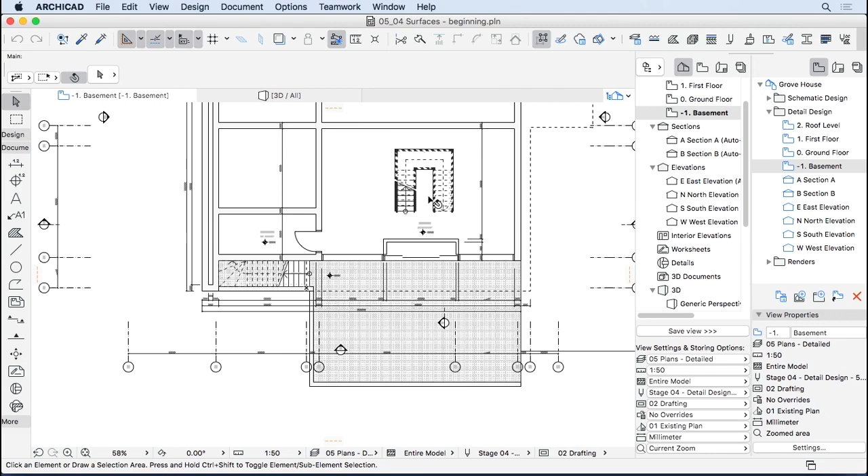Now let's take a look at the surface. I'll go here to the 3D view. Every element in ArchiCAD has a surface. Some of them have an image, like this stone wall here, and some of them have just a color.

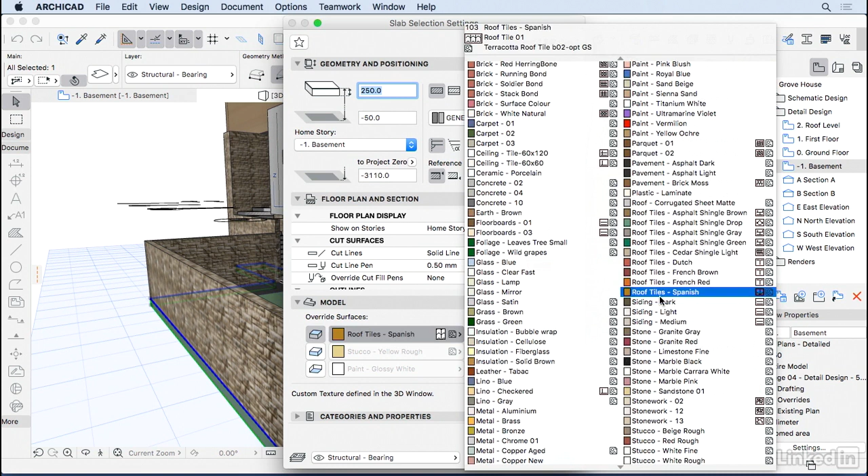Let's select this slab, go to the settings, and override the top surface with one of these surfaces. From the list you can see some have an image, some have a texture, some don't have any. I'll choose some kind of pavement - this pavement brick moss, which has a texture and also a fill. I'll press OK.

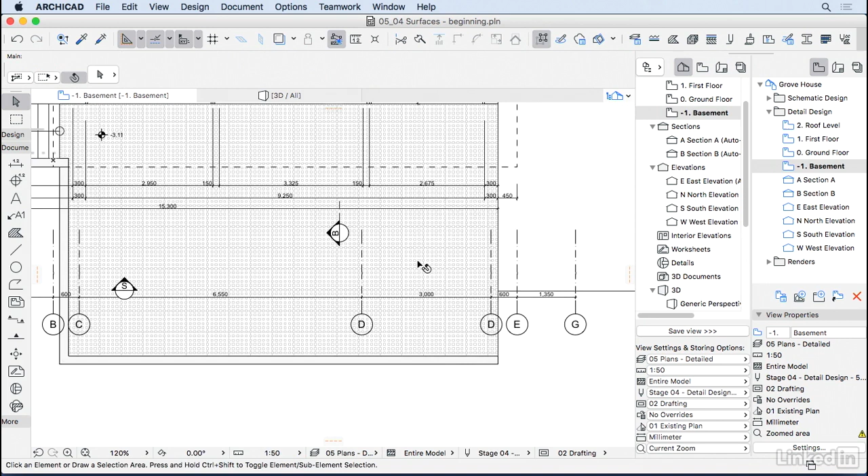If we look closely, you'll notice we have a picture. Let's go back to the floor plan, and we still have the grass paver texture here. That's because on the settings of this slab, we chose the grass paver cover fill. But if we check this box that says 'use fill from surface,' we should get the fill attached to the surface. That's better practice, so the 3D matches the 2D.

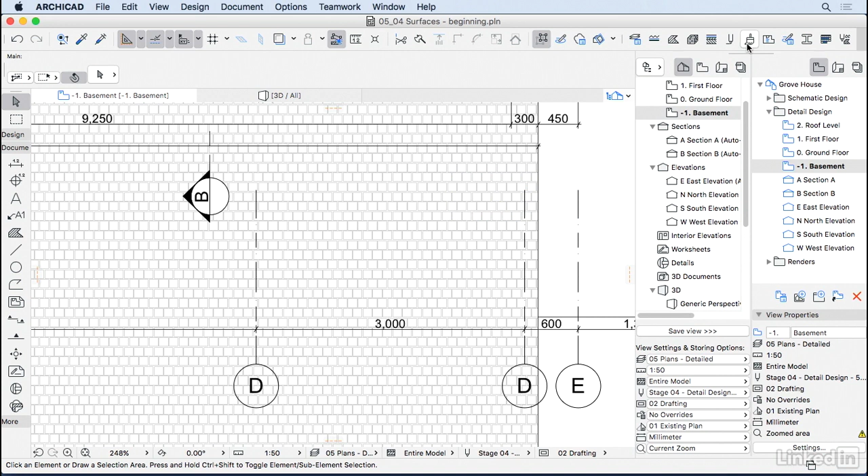So let's create our surface for the grass paver. To do that, we go to the surface option on the attributes bar. Here in these settings, we have first a list of all the surfaces currently in ArchiCAD, and buttons to create, rename, share, or delete a surface.

We can choose the engine we're doing the settings for. We have OpenGL, which is normally what we're looking at in the 3D, and CineRender, which is used when doing renders. We can do all the settings for render there, but we're not going to do that now - we're going to focus only on OpenGL.

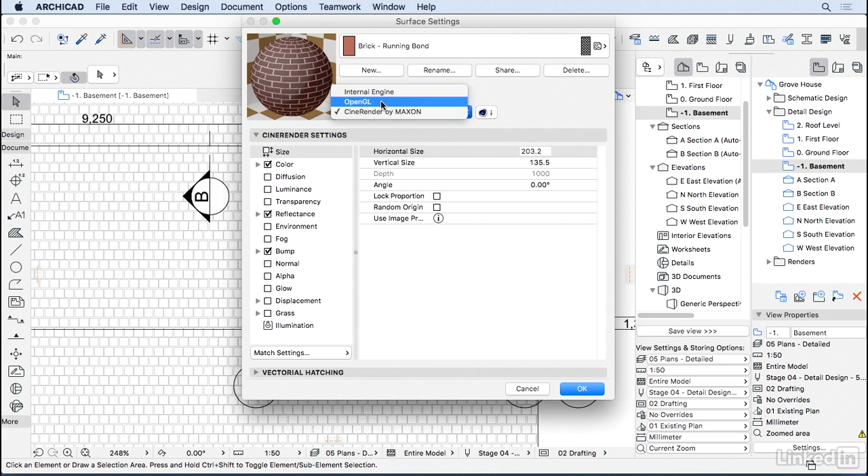We can change exposure to light, the surface color, whether it's transparent, and how the emission is - we're not going to change any of these now. We can also choose a hatching, which is the fill that goes on top of the surface, and finally a texture, which is the image that goes into the 3D.

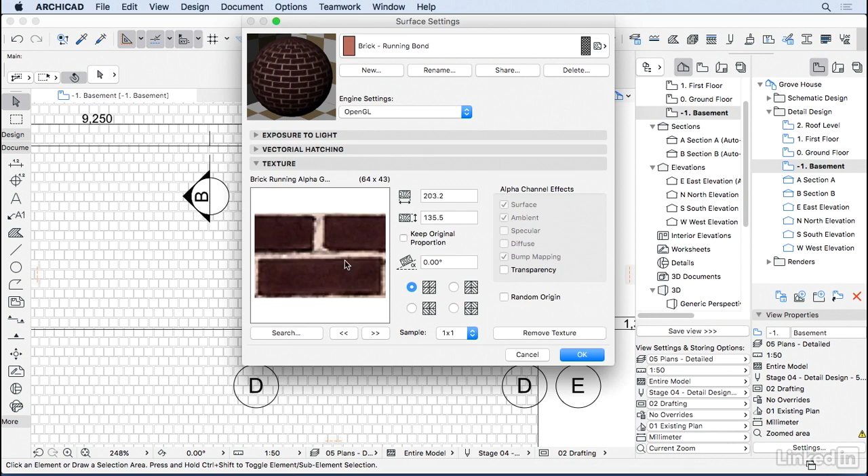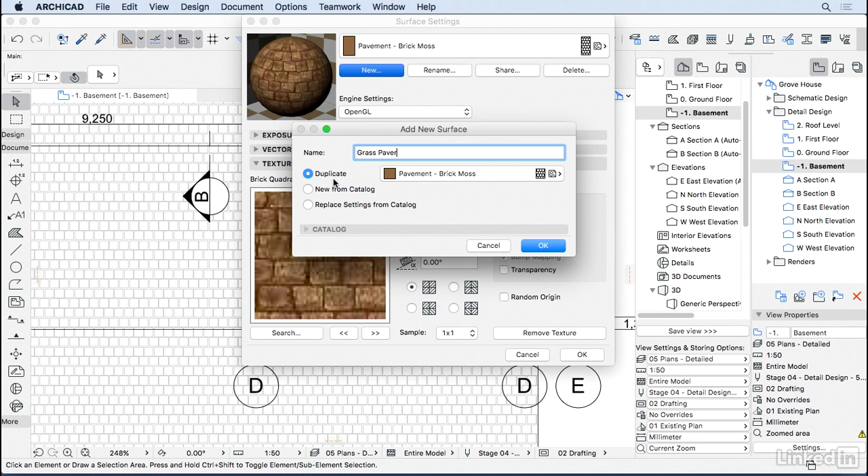So let's create our grass paver. I'm going to create it from one of those pavers already - I'll choose the pavement brick moss and press new. This way I'm duplicating and getting all the properties of that paver. I'll name this grass paver, duplicate, press OK. Here we're going to change first the color - I don't want it brown.

Let's double click here. I'm going to choose a kind of gray, but keep all the other settings for reflection and emission.

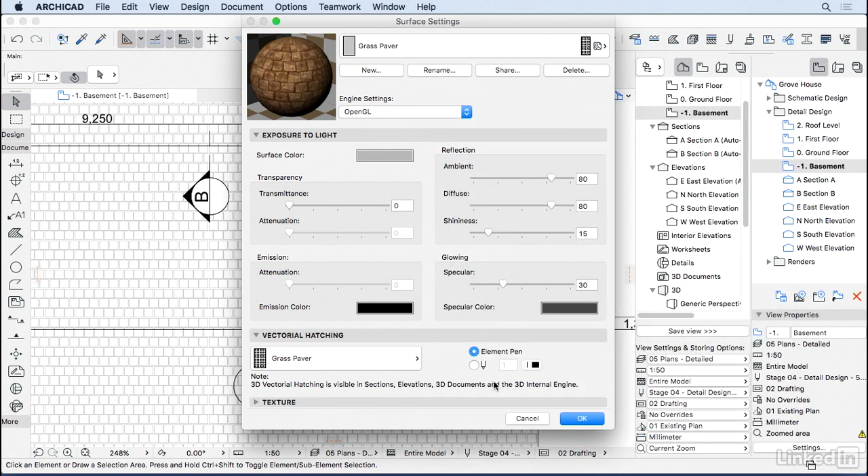Under the hatching, I'm going to change this pavement 14 and choose the grass paver. And for the texture, I want to choose the image I have - I'm going to choose this texture here.

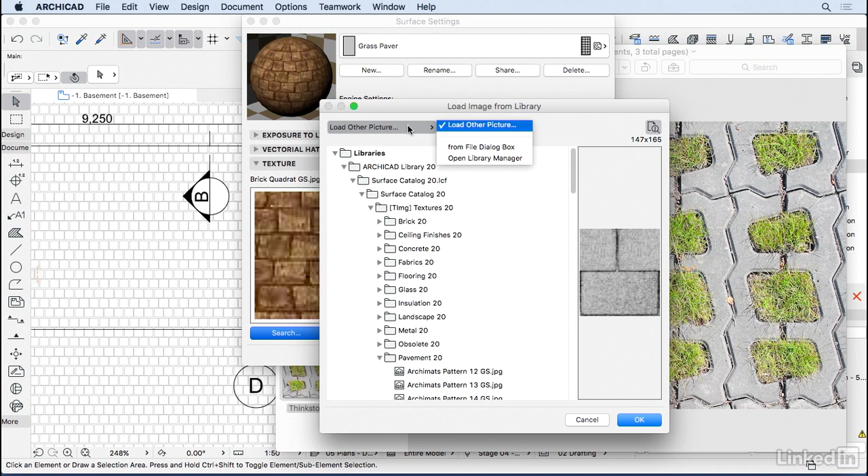Going back to the surface settings, I'll go on search. We have a lot of images built into ArchiCAD you can choose from, but I want one from the file. I'll click 'load other picture from file' dialog box, then go to the exercise folder, surface, choose this image, and press open. There we go - now this image is part of my embedded library. I'll press OK.

I just want to make sure I have this box checked, keep original proportion. And I'm going to change here to 500, which is the size of the hatch we did before. Then I'll go ahead and press OK.

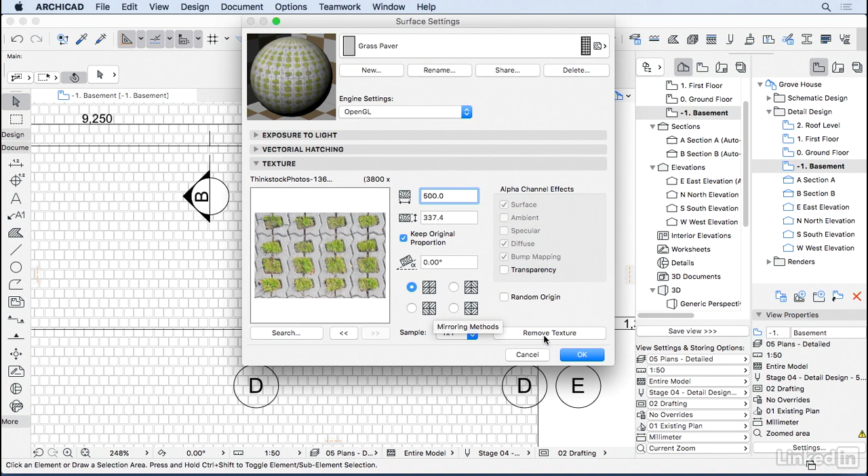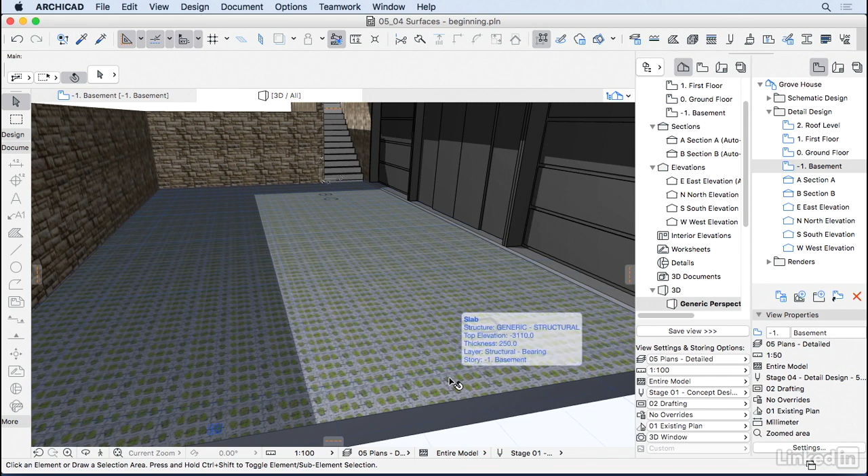Now if we go back to the 3D, I'll select this slab, Ctrl T or Command T, and we should be able to choose the grass paver surface here. There we go, press OK. Now if we take a look, we have that texture. And if I go back to the floor plan, we should also have the original grass paver hatch back.

So creating or editing the surface is something we do a lot throughout the project, so feel free to create as many surfaces as you need.